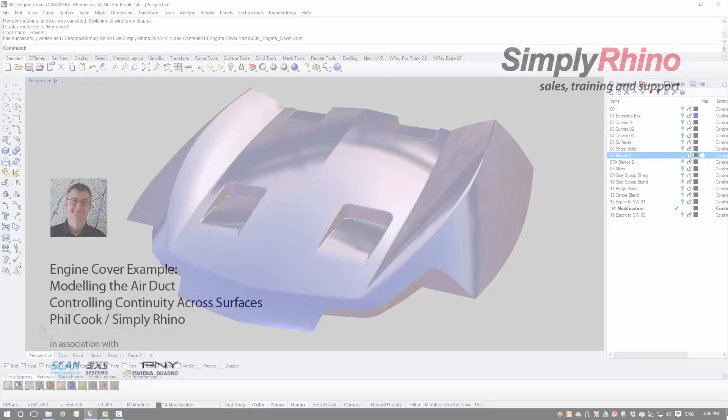First, I'm going to take a look at creating this scoop on the main engine surface. There are two main considerations here. First, we need to maintain a seamless continuity between the main surface and the lead-in to the duct. Second, we need to control these edge blends so that they transition from a relatively straightforward edge blend condition and then run into the main engine cover surface. These are both fairly common problems in 3D modeling, even though the specific context might be different.

Once we have the scoop completed, we'll then take a look at mirroring the two halves of the engine cover and then creating the final center blend. Finally, we'll make sure that everything is ready to export into SolidWorks.

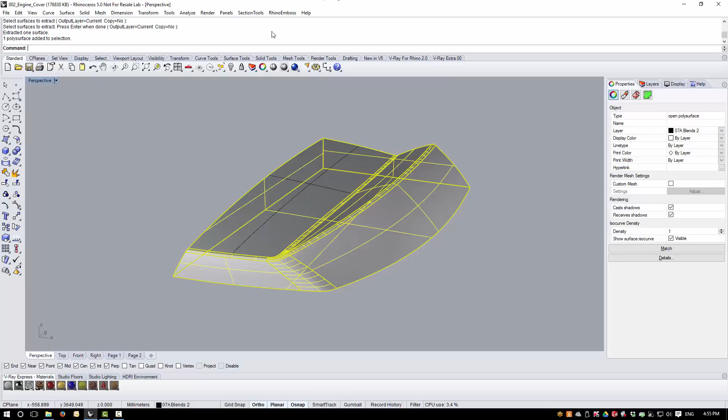This is the result we obtained from the modeling we covered in the last video exercise. Now, to start to add the duct detail into this top surface, first of all I'm going to extract the top surface, the main top surface here, and I'm going to hide the rest of the geometry.

I then need to add some curves to describe the sharp boundary of the duct area. These can be either curves that you draw and then project onto the surface, or in this case they're actually created from isocurves. The advantage of using isocurves to create the boundary shape of the duct is that the shape that's created will be very close to the overall shape of the surface.

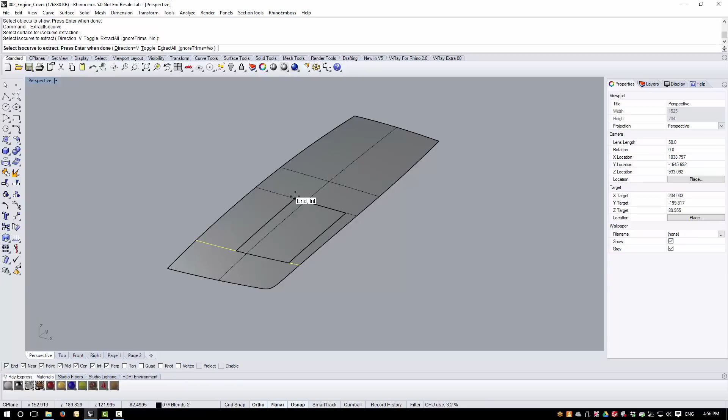So to create these curves, I went to Curve, Curve from Object, Extract Isocurve, and toggled to produce curves in the other direction.

And then once I have these curves, I can trim them up with each other and join them. We need to make sure, by just checking in object properties, that the curves, when they're joined, produce a closed curve. Once we know that's the case, we can then go ahead and split our main surface with this closed curve. And I'm just going to hide the curve now.

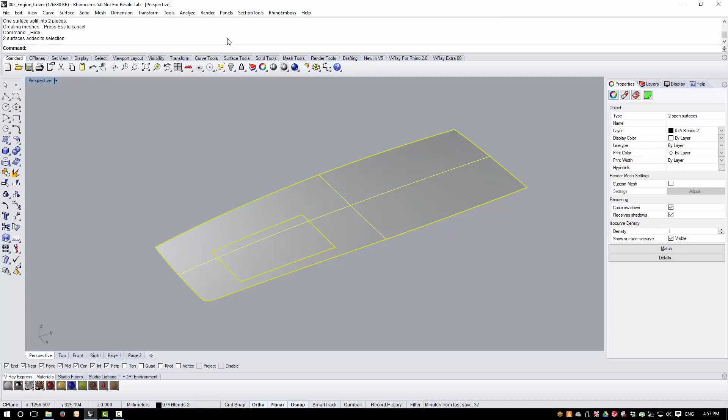Now, of course, because these two surfaces are essentially derived from the same parent surface, if we go to our Analyze, Surface, and Zebra tools, the area that we've trimmed out will be completely curvature continuous with the surrounding area.

The idea here is that we're going to leave the front edge of this surface as it is and adjust the rear edge of the surface to create the scoop. The fact that we don't change the front of the surface means, of course, that it's going to be curvature continuous with our existing surface.

Now, the first thing that we need to consider here is if we look at the control points for our small trimmed surface, they actually describe the overall larger surface, because when you trim a surface you don't actually change the control point structure.

What we can do to make our control points here more manageable and relate more closely to our trimmed surface is to select the surface and run a command from Surface Edit Tools called Shrink Trimmed Surface. What this command does is reapproximate a new surface that has the same shape in U and V, the same number of control points, and the same degree in U and V.

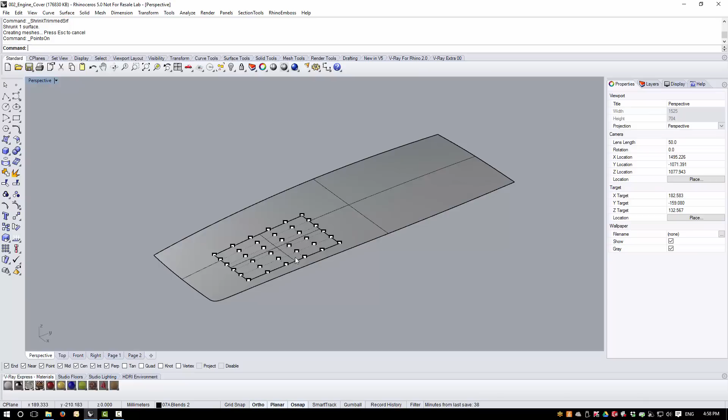The idea being that now our control points are relative to our smaller surface, but when we analyze the curvature of this with our Zebra tools, we'll see that our surface hasn't changed in terms of its shape, and so our two surfaces are still completely curvature continuous.

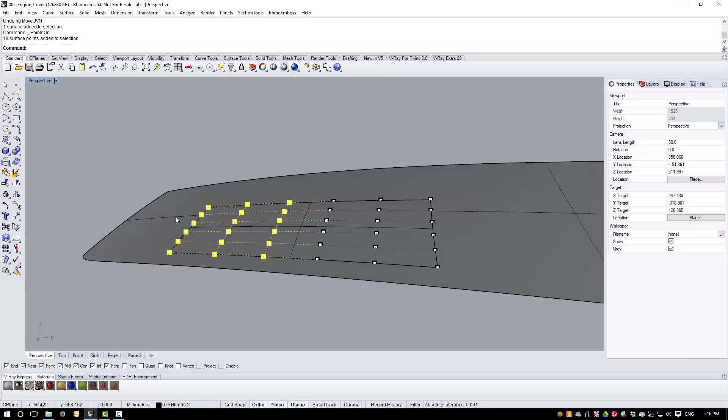If we take a look at the control points on our newly shrunk surface, what we know is that these first 3 rows of control points need to remain exactly where they are in order for us to maintain the continuity at the leading edge of the scoop or duct. So it's only these 3 rows of control points that we can move.

Now, before we go on to really look in more detail at the shape of the scoop, let's have a look at the principle behind this. So the principle is that we don't move the first 3 rows of points, we leave those exactly where they are, and the subsequent points we can move.

Now, a good way of moving these is to use the Move UVN tool, which is situated in the Transform menu. What the Move UVN tool does is move control points either in the U direction, the V direction, or the N direction, the normal direction, relative to a surface. Now, normal means locally perpendicular, so each one of these control points will move locally perpendicular to the surface. So this is an ideal tool for either adding a recess or a protrusion to an existing surface.

The value that we put into this box here, into the scale box, is a real world value, and if I move a slider from the midpoint to either end of the slider here, I'll move the control points by 12 millimeters in a normal direction to the surface. So if I grab these 3 rows of points here and move them, you can see that I can start to create a dip in the surface.

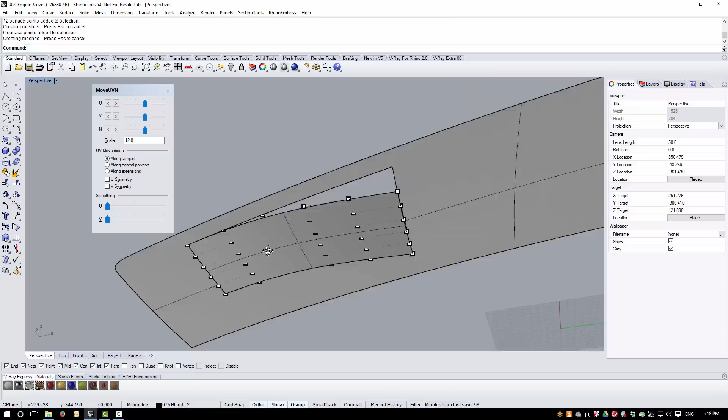And very quickly, just to show the principle, I'm going to now grab the last 2 rows of points and move those downwards, and then finally the last row of points and move those downwards again. So you can see now I've started to create a surface which of course now changes from our original surface and starts to create the scoop.

Now, because we haven't moved these front 3 rows of control points, when we look at this surface with zebras, you'll see that we have perfect curvature continuity between our existing surface and our new surface at this leading edge. And so the principle really is that we don't need to worry about matching this surface to our existing surface, because we know that our control points are already doing this for us.

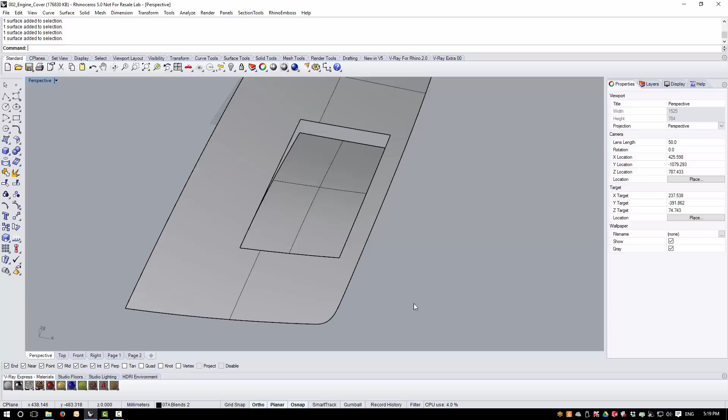Now, the one downside here of this method is that we don't have very many control points to play with here, and there's a large area of this surface that we can't move. So what we could really do with introducing here are more rows of control points, so that we can put a little more shape into our scoop, and that we can have the scoop starting to change direction a little closer to this leading edge.

So if I just undo my Move UVN operations and get back to where we were a few steps ago, I'm going to look now at introducing some control points into this surface. Now, the way that we do this is important. If we just add control points into the surface, we are going to change the shape of the surface, which of course is then going to lose our matching. Likewise, if we rebuild the surface.

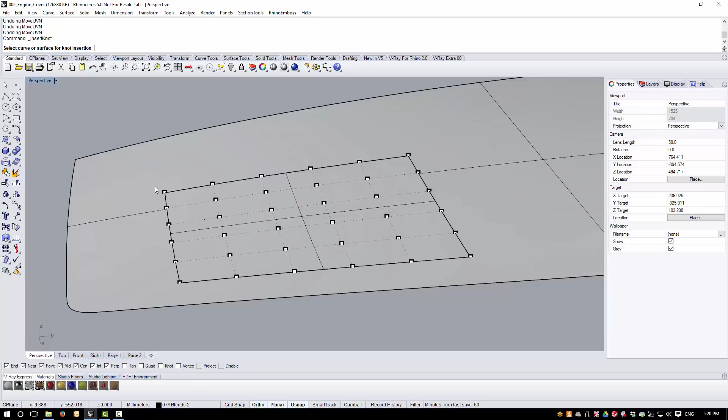So what we really need to do here is to insert knots into the surface, which will add control points by implication. So I'm going to go to my Edit Tools, Control Points, and Insert Knot. I'm going to pick this surface here, and I'm going to add a knot line that's just behind this first 3 rows of points. And then I'm going to add a knot line that's just behind what is now the 4th row of control points.

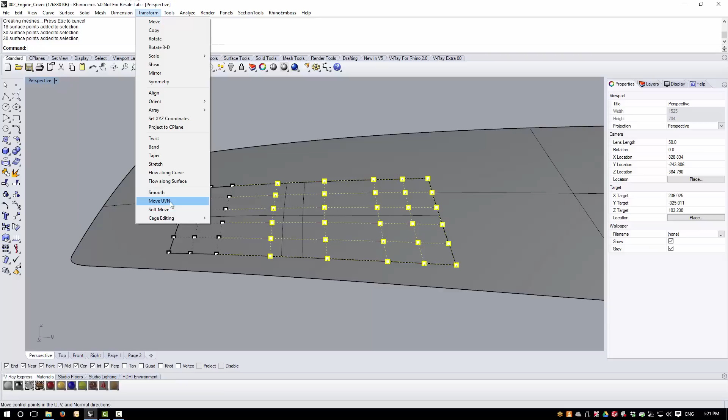And this is the result that I'll get now. My 3 control points, which are still controlling the matching, have now effectively moved much further forward. So now I can move all of these points and get more shape going on in the scoop. So again, I'm going to do something similar here. I'm going to go to Transform, Move UVN, maybe adjust this distance slightly, and I'm going to move all of these control points down.

The nice thing about this tool, being slider based, is that you know that you can push this back and get back to your original position, and I can then change the value here, and it's a nice tool to actually interact with. So gradually going to push this shape down.

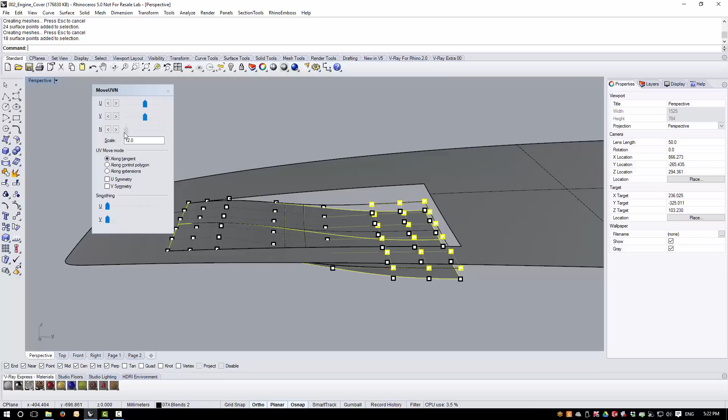Now what I've decided to do here is that I'm actually going to move these last 3 rows of control points together. So I introduce a kind of an S shape into my duct surface here. And the idea about using Move UVN here is that the surface that I've now created still has a lot in common with the top surface, so that this edge is going to be fairly common to this edge, and the fall off as it goes from left to right here is going to be fairly consistent with this surface.

So again, let's take a look at the continuity here. Okay, so that front edge looks okay. Let's also take a look at this with an environment map.

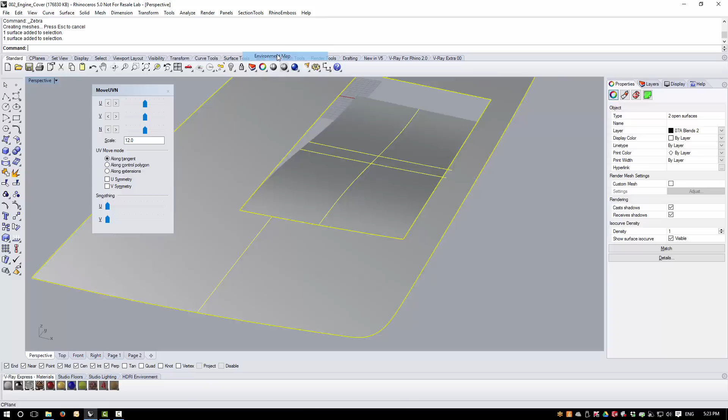Okay, and that looks quite nice. Okay, so you can see that we've got a seamless transition here between our 2 surfaces. So the zebra stripes that we use here really only give us an indication of whether we have curvature continuity

across our 2 surfaces. So to check with more accuracy, we can either go to Analyze, Curve, and turn on the curvature graph for both of these surfaces, or sometimes where we've got a simple proposition like it's just one single edge here, we can go to Curve and Curve from Objects, and we can extract an isocurve from both

surfaces and make sure these isocurves are coincident, and then we can go to Analyze and Curve and Geometric Continuity, and we can test the continuity across those 2 curve ends. Here we'll see that Rhino is reporting that these are G2, which is curvature continuous, and we could check this at a number of positions along this edge.

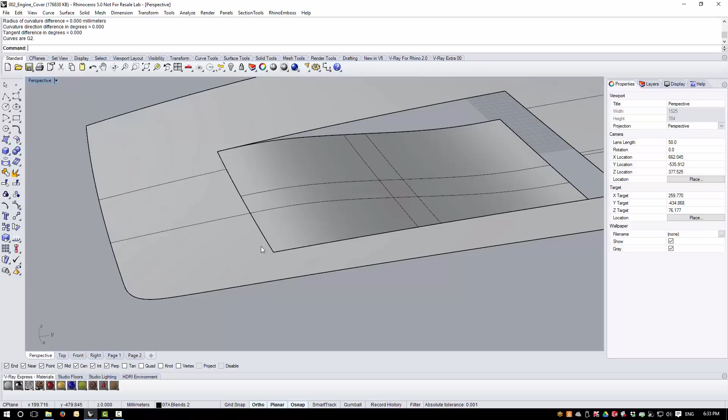So once again here, technically what's doing this for us is that these 5 control points here, the middle one of which is a coincident point, are required for a G2 curvature match. If we wanted to match beyond G2, then it's the next pair of points that would be required to be involved in the match for a G3 match. But in this sort of situation here, G2 curvature continuity is fine.

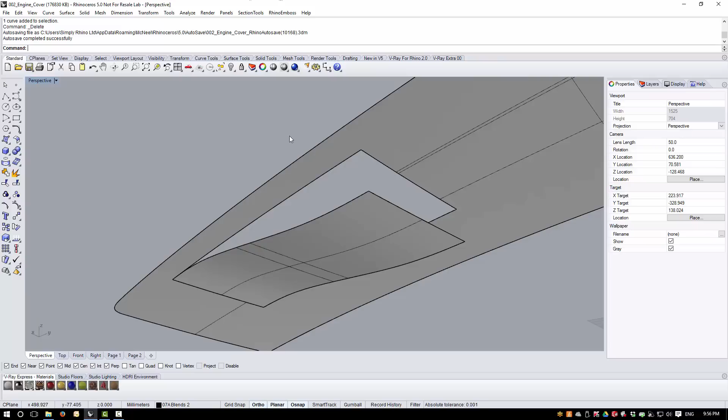Let's now take a look at making the side surfaces for the duct. First of all, I'm just going to check my distance between this point and this point, which is 36 millimeters, and I'm going to have some fairly simple linear sides to this duct, but I want to put a 10-degree taper on all 3 sides of the duct.

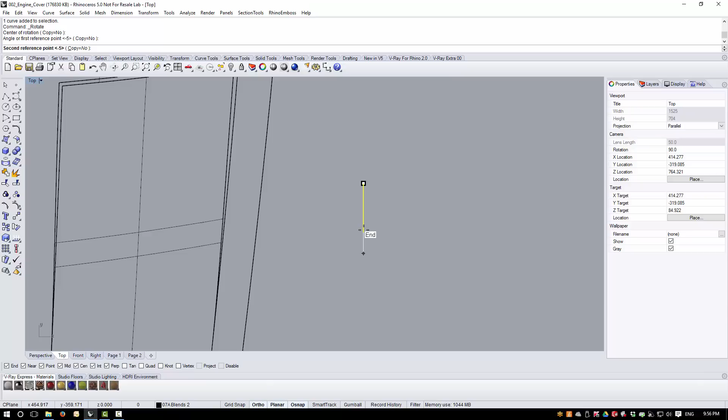So how I'm going to look at doing this is, first of all, to draw a line. This line I'm going to make slightly longer than my depth of the duct, so let's make this 50 millimeters long, and I'm going to put a point on the top of the line, and then I'm going to rotate this about the minus 10 degrees that we need here. Okay, and this is drawn in top view, and we're working in our world top C-plane, which is also shared here by our perspective view.

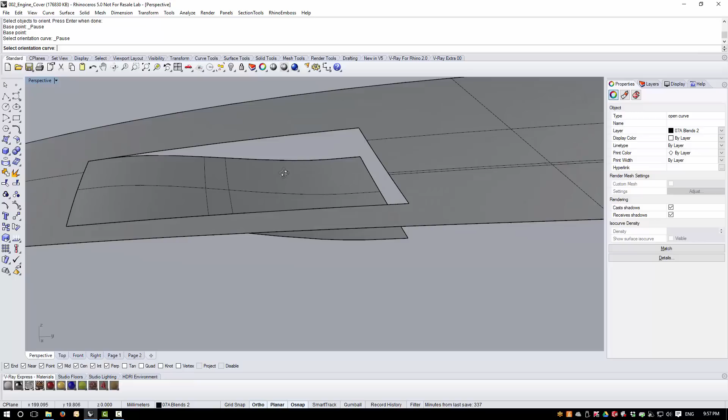The idea here is now I'm going to orient this curve onto these three edges, doing this in three separate operations, and to do this I'm going to use Transform, Orient, Perpendicular to Curve. So this is the object that I want to orient, and this is the base point, and let's start first of all with this rear edge, and you can see I can orient this onto this edge. I'll make sure the copy option in my command is turned on, and I'll snap this to one end of the rear edge. Okay, and then I'll repeat this process for the sides.

So Transform, Orient, Perpendicular to Curve, object to orient, base point, and edge. Helps if you can look down the curve when you use this command, just to make sure your 10-degree angle in using this example is facing the correct way. So once more, Transform, Orient, Perpendicular to Curve, object to orient, enter, base point, and then pick the orientation curve.

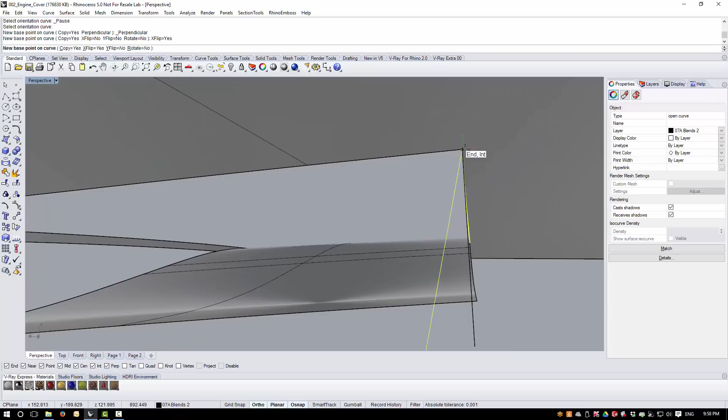Okay, here I need to flip the curve, flip the orientation in X to make this taper inwards and then snap to the end of the edge. Okay, once we've achieved the orientation, we can then use a one rail sweep to create the various surfaces. So Surface, Sweep One Rail, do the sides first. This is the rail, and this is the cross-section curve.

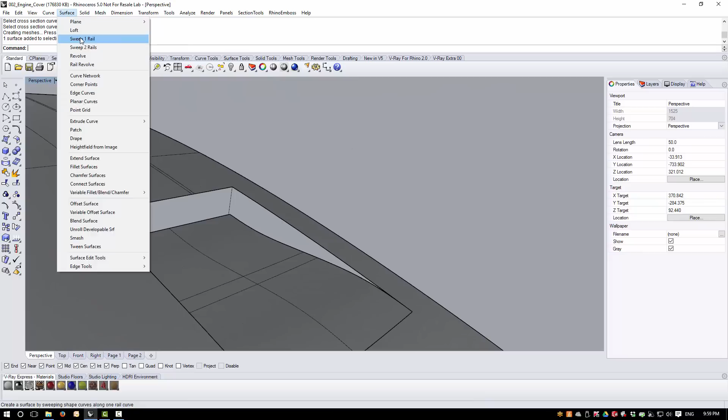When I use this command, I can use the simple sweep option here to give me some simplified geometry and a cleaner result. Repeat the process over here. Rail, cross-section, simple sweep, and then do this for the rear.

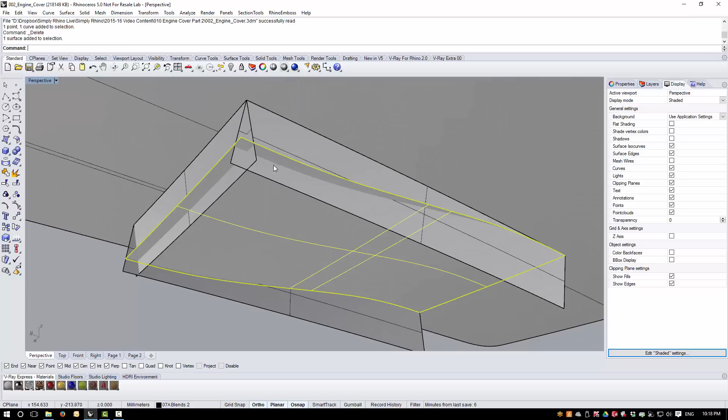So next we need to trim these surfaces with each other. So I'll just remove these curves, and to trim these surfaces I'm going to generate an intersection curve between the surfaces in question to start off with. You'll see that the surface edges don't actually run into each other exactly here. So the process that I'm going to use here is something like this.

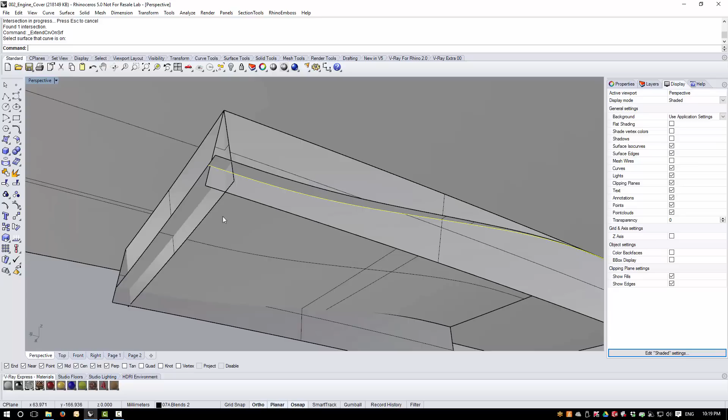I'm going to go to Curve, Curve from Objects, and Intersection, generate an intersection between this side and our scoop surface. That gives me a nice intersection curve, and then just to check that this curve is running all the way along both surfaces, I'm going to go to Curve and Extend Curve, Curve on Surface. Okay, and then I can trim these portions here. Can do the same on the other side.

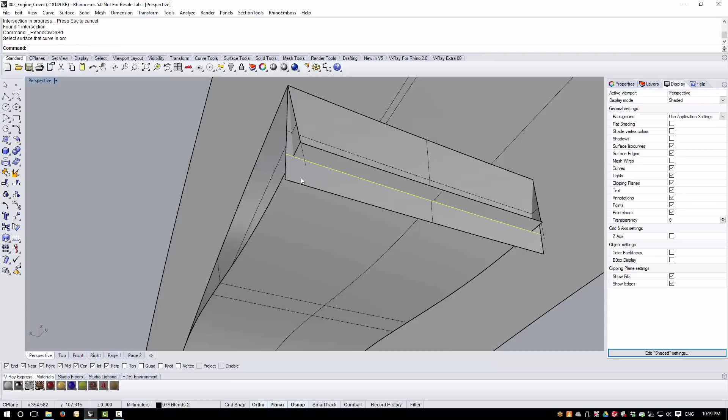So curve, curve from object, intersection, and then curve, extend curve, curve on surface, and then I can trim, and then finally this one here as well. Okay, and then we should be able to trim these surfaces now with each other.

Okay, so I can select my curves, delete the curves, select everything and join everything together, and then I want to check to see if all these edges are closed. So select the poly surface, go to my analysis tools, run show edges, make sure that only naked edges are selected in here, use a nice bright color, and you can see that all of this is closed up nicely in here.

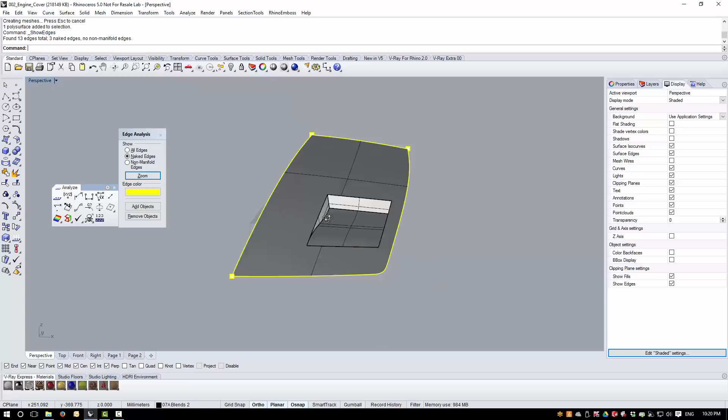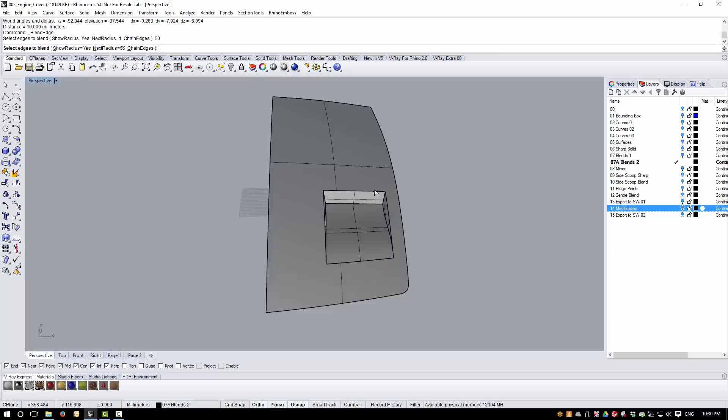So we've now got our kind of sharp version of our scoop or duct. So now I can start to add in the blends. So first of all, I'm going to put in the two larger corner blends. So I'm going to go to Solid, Fillet Edge and Blend Edge. I'm going to use a radius here of 50 millimeters, and I'm going to pick this edge and then enter to get into the preview.

And the rail type that I'm going to use here is distance between rails. So this takes a perpendicular measurement across these two edges here. Okay, and then I'm going to enter and let that build. Again, you can check this at each stage with the environment map just to make sure everything looks okay.

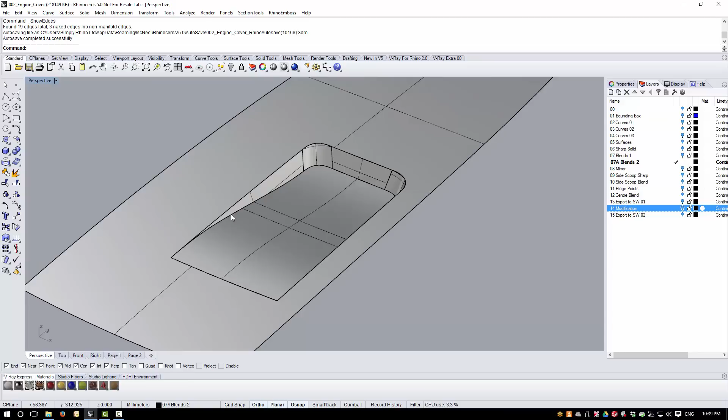And then now for the more difficult part. So as previous, I'm going to use the Solid Blend Edge tool for this top rail and this lower rail here. And as in the previous video, the blend will build correctly up until the point at which the edges of the blend run into each other, and then they will cross over each other. That's fine because it means that the rear part of this blend will build correctly, and the difficult part we have full manual control over.

So let's build our starting blends. So Solid, Fillet Edge, Blend Edge. I'm going to choose a radius of 10 millimeters here, and I'm going to pick the entire top edge and then the entire lower edge. Enter and look at the preview that we get here.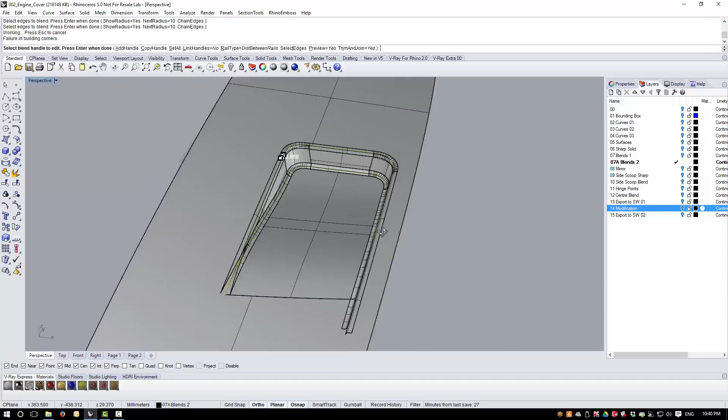You can see that the outer edges of these rails possibly are not too wrong here, but Rhino isn't really able to trim up the interim part here. And this edge over on this side, again, the outer edges are almost probably where they need to be, but again, nothing is built in the middle here. But this is a fairly easy solution now for us to remedy manually.

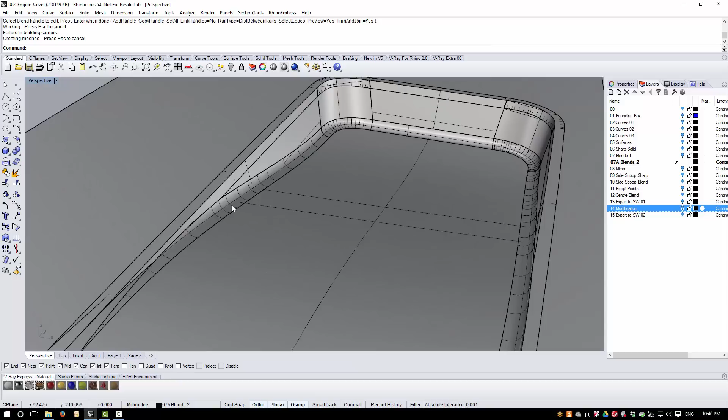So I'll enter to build the blend, and what we have here is a series of surfaces that have not trimmed my sharp-sided poly surface at all. And what I need to do first of all is to split these surfaces about the point at which they intersect each other.

So I'm going to go to Surface, Surface Edit Tools, and Split at IsoCurve, and I'm going to just make sure I find the correct point here, turn Shrink on here, and split this piece of the blend, and then split the upper part of the blend, again with Shrink on, at the coincident position. Now, I'm not going to throw away the front of the blend because I may need those later on, so I'll just hide these.

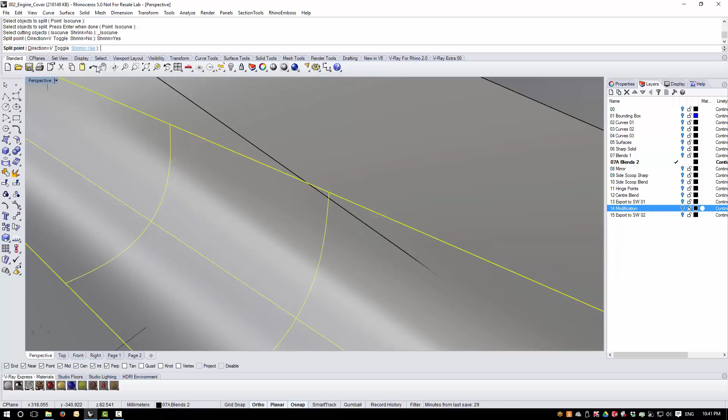And I'm going to do the similar sort of thing over the other side here. So Surface, Surface Edit Tools, Split at IsoCurve. Just zoom in, make sure we drop right on that intersection. Make sure we enable the Shrink option and split, and then same with this surface, and then hide these front parts.

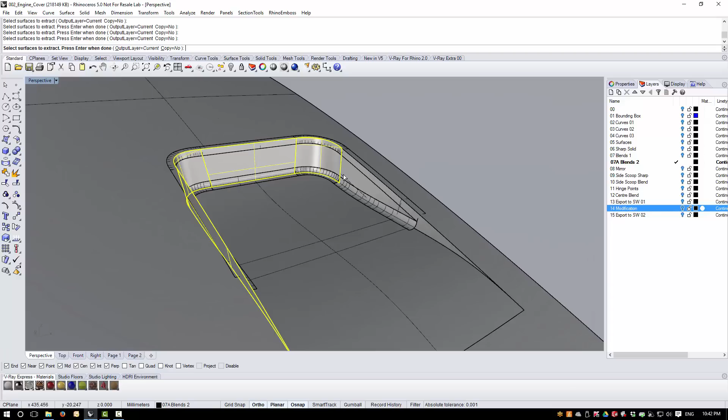Okay, so if I just extract these portions for a moment, we can then hide this part, and let's just trim away the side surfaces now with these blend parts.

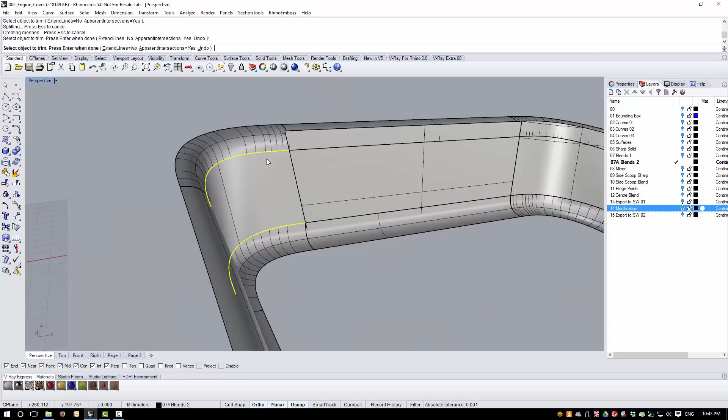So I'll run trim, I'll type in CRV so I can only pick edges, and I'll start to trim away these sides. Okay, so each time I'm picking the curve option here and just carefully trimming away these surfaces.

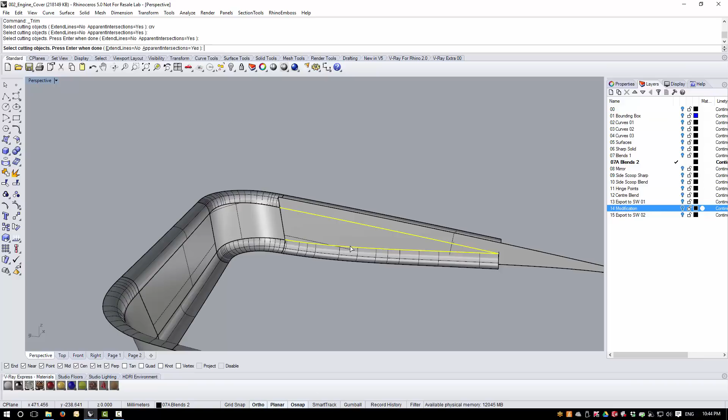And then now the final piece here. Okay, and then we can join these together. And we can check that these parts have joined together correctly here. That looks good. And then just take a quick look at these surfaces, make sure everything looks all right there. That looks fine.

Okay, so now let's show back in the rest of the poly surface that we need here, and let's look at what we can do with this front. What we need to avoid with these fillets as they come towards this front edge is running them to a point. It's perfectly valid to have a fillet condition here where you run into a point, but in this case the geometry is not going to look quite right for us.

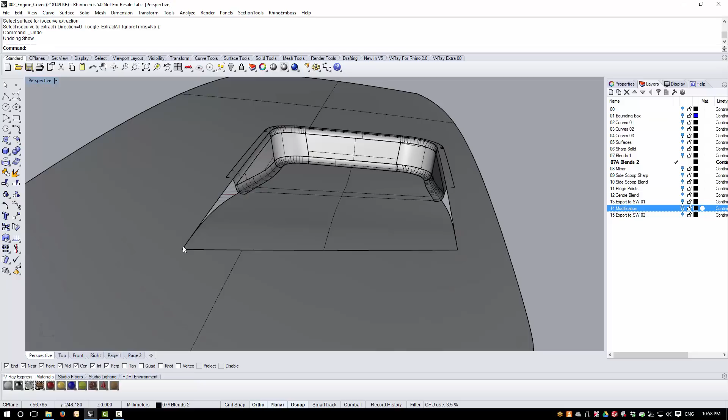But more important than that, because we have essentially one or two three-sided surfaces that are going to converge to a point, that's going to give us a big problem when we offset to give us our B surface. When we shell this out, it's going to give us a condition that will fail. So we want to create here a condition that not only looks good, but is also going to have enough integrity to be able to shell later on.

Now, if we look at, for example, the one side here of what Rhino actually built for us, you'll see there's a fair amount of consistency about these rails here. And if we continued this edge, the front edge of the scoop here, along here, you can see that we can get two four-sided surfaces here that start with the two blend shapes and then will run off to blend into the main engine cover surface at the front. So we can actually use most of these edges that Rhino has built for us here.

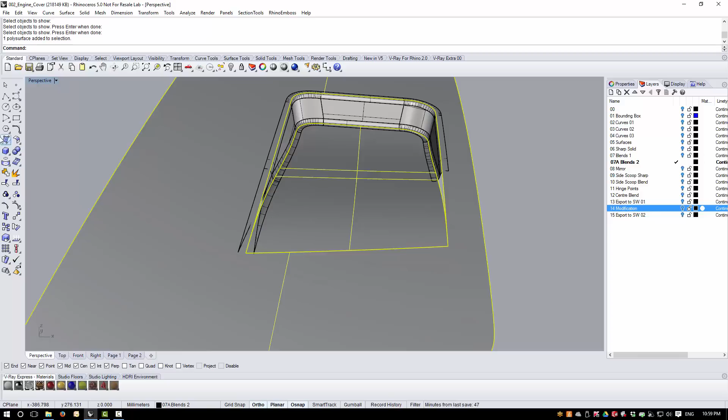So let's just look at this side first of all. I'm going to just explode this surface so this part and this part are separate, and I'm going to extract an isocurve here from this main surface and snap that to this leading edge. Remember, we created this leading edge with an isocurve, so this is helpful to us now.

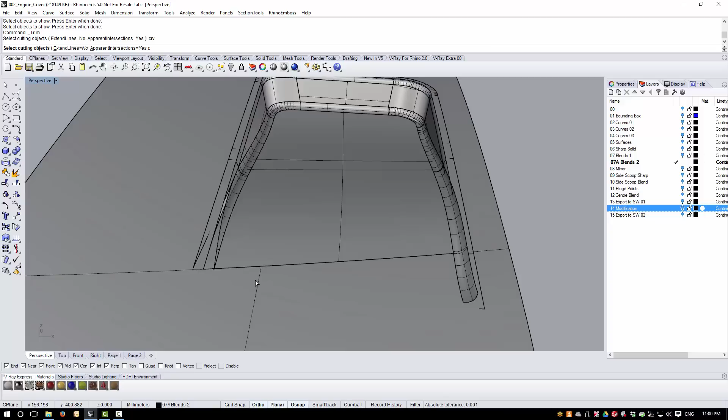Now let's bring in the other surfaces here as well, and you'll see we have a similar sort of situation here where the consistency of these outer edges of these fillets is actually quite good. So I should now be able to run trim and again type in the curve filter so I can only select curves and edges, and I'm going to trim the scoop surface with those edge curves.

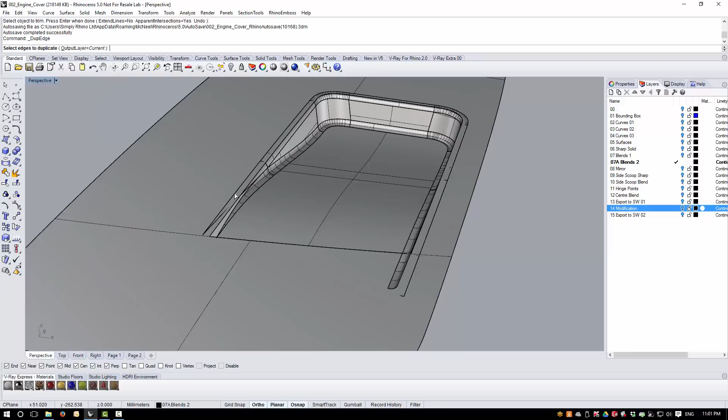And then I'm going to duplicate these two edge curves. Curve from objects, duplicate edge. There. Okay. And now I'm going to hide these surface parts here. I won't delete them just yet in case I need to backtrack at any stage.

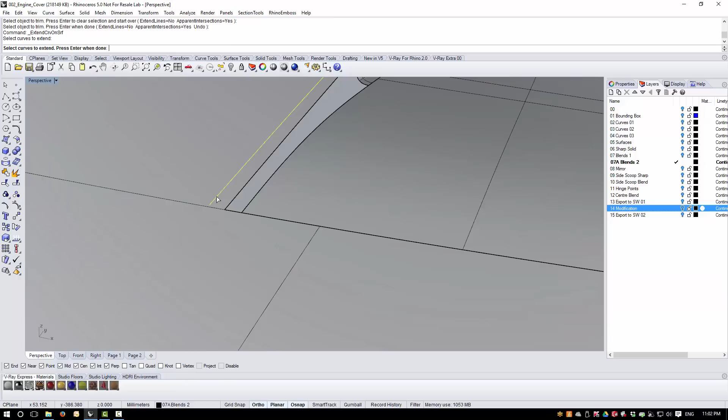This here can be trimmed up like so, and here this edge is a little short, so I'll extend curve on surface here, and then I can trim these parts up with each other like that. And now I should be able to trim this outer blend edge from my main surface. So this is a combination of curves and surface edges here.

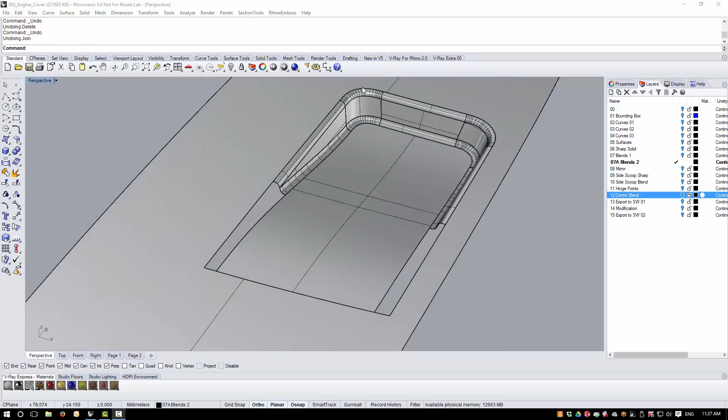So I'm going to run trim, use the curve filter, and then pick these edges and these front curves. Okay, and trim this out. Having trimmed our top surface with the outer boundary curves, we can now join everything together and then select any remaining curves and delete those, and check using our edge analysis that all our edges around here are joined up correctly.

And also, as we go along, it's worth checking with an environment map and also zebras as we go to make sure that we're not storing up any problems. So just want to look at the continuity here. Need to zoom into these areas to see zebras, and we may need to adjust meshes as well.

When we created the corner of the main surface in the previous video, we introduced a blend curve from this point here to a midway point on this edge, and we created two four-sided surfaces and then matched them to each other. We can do something similar here, and before I do that I need to make sure that this short edge here and this short edge here is split about its midpoint.

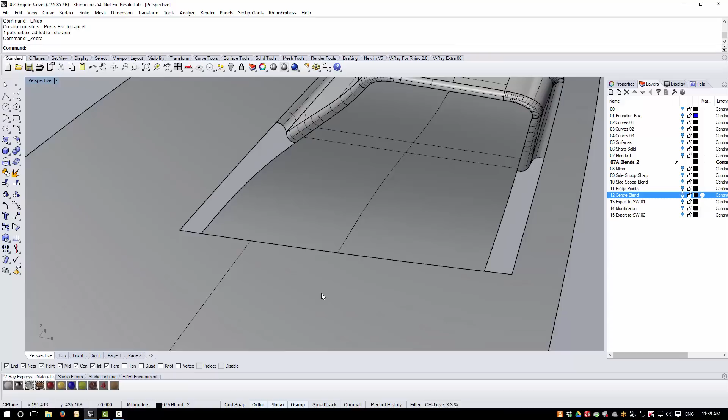This should have been the case from when we trimmed, but just to make sure that is indeed the case, we can go to Surface and Edge Tools and Split Edge. We can pick this edge here and split it about the midpoint, rerun the tool, and do the same over here.

Okay, now if we were to use the adjustable blend curve, we can either blend curves or edges, but we can't blend one of each. So because it would make more sense to use a curve for this position, what I'm actually going to do is to generate an ISO curve here and here that snap to the split edge. So I'm going to go to curve from objects, extract ISO curve, and snap to the end here and the end there. So now we can look at creating the adjustable curve blend.

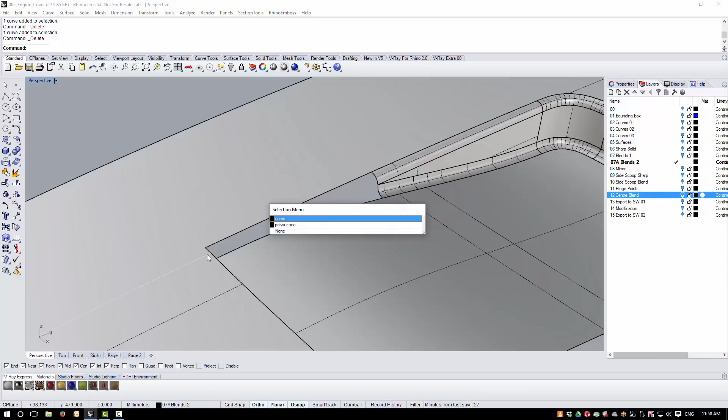So let's go first of all from this curve here to the lower edge of this top rail here. So let's go to my adjustable curve blend tool, pick this curve and then this edge, and we'll blend between there. Now because of the way that the geometry is working here, we're going to see a big difference in this curve between blending from this edge and this edge.

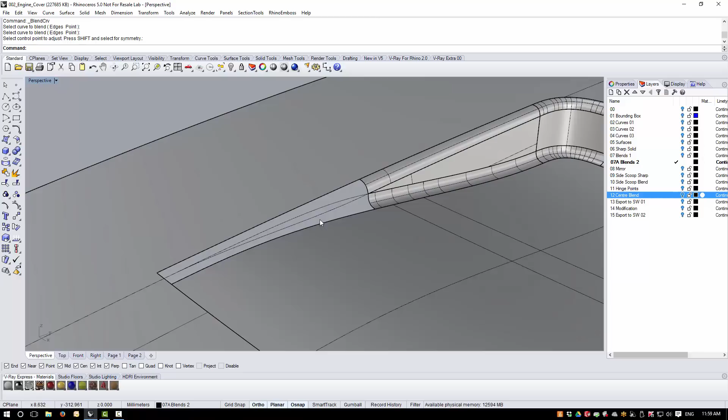So let's repeat the adjustable curve blend and blend this front curve to this edge. And here we'll see that we generate two quite different looking curves, and probably what we want is somewhere that's between these two curves. And there is a method here that we can use that will give us that result. So I'm going to delete these two curves, and I'm going to create a curve that's an average of this edge here and this edge here.

So to do that, I'm going to go to Curve and Tween Curves, and I'm going to pick this edge and this edge, move my cursor to the left edge and click, and you'll see that I can generate a curve now which is an average of those two edges. And if I go back to my adjustable curve blend here, we might see that this gives us a slightly better looking result.

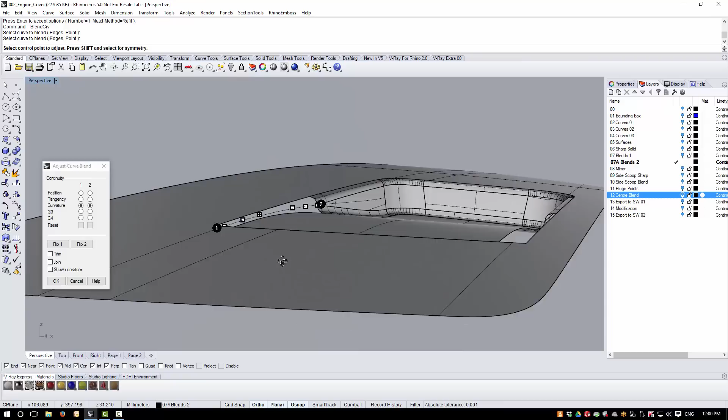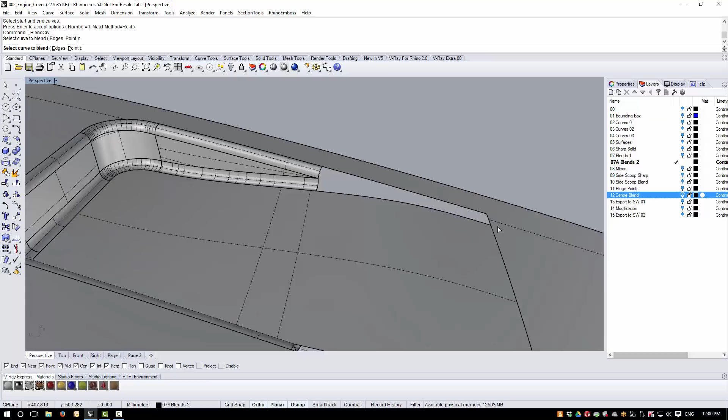Now we need to look at this curve carefully and make sure, for example, that this curve isn't dipping below this scoop surface here. So let's just take a look in right view here and confirm that, and that looks okay for the moment. Now with this process there may be an element of iteration, so we may need to redo this process a few times. But for now I'll use the similar process on the second side. So tween curves and then adjustable curve blend. And take a look at this curve as well, and we'll accept that.

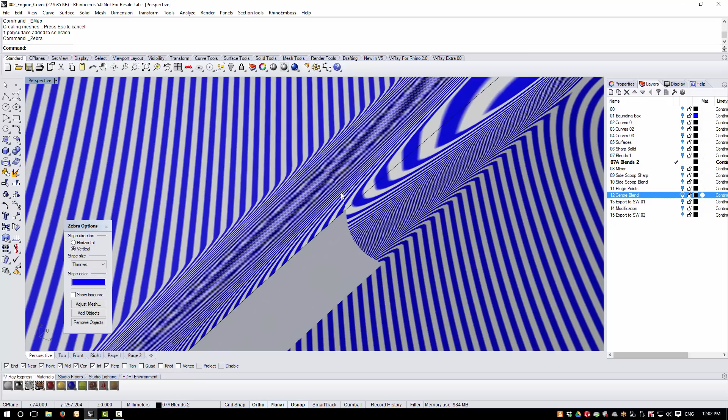What we can see if we go in close to this front edge here is that we're slightly out of continuity there. And let's have a look at this point here, and again just slightly out here. So before we start to get too worried about that little lack of continuity, one thing that will help the zebras is actually joining these two surfaces together. So let's do that and see what this front edge looks like now, and you'll see that looks a lot better. So for the moment I'm going to leave the surfaces as they are. We should just actually check, I guess, that these are actually joined up properly. Okay, that's fine.

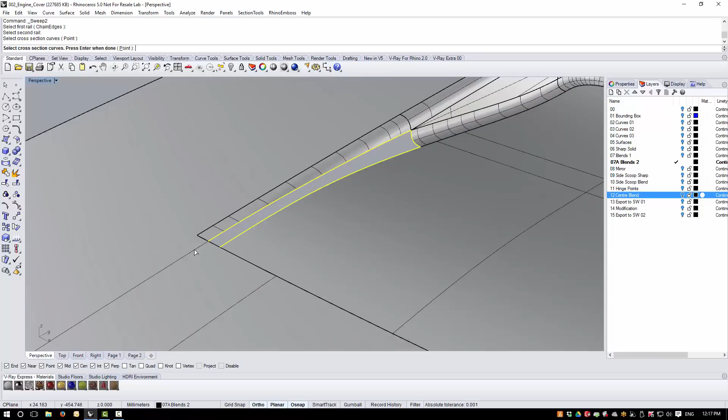And let's build in our other surface here, and let's again use a sweep 2 rails. So edge and edge as the two rails, and then these two edges as the two cross sections. Match curvature across both. Let's join them. Check first of all that they join up. That's okay. And now let's have a look at the analysis. Okay, so shape-wise that doesn't look too bad there. And let's take a look at the zebras. Just look right across that front edge. That looks okay.

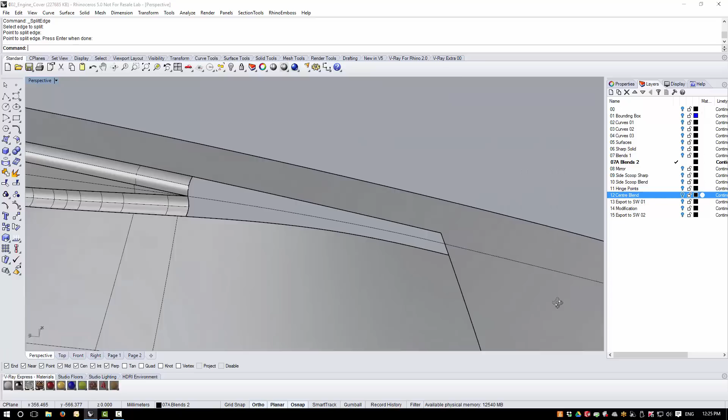So let's take a look at doing something similar on the other side. So surface, sweep 2 rails, first rail, second rail, cross section, and let's match for curvature on that top edge. Take a look at this shape that we get here.

Okay, that looks okay. Take a look at the front edge with the zebras. Just pull right into that edge. It's not too bad.

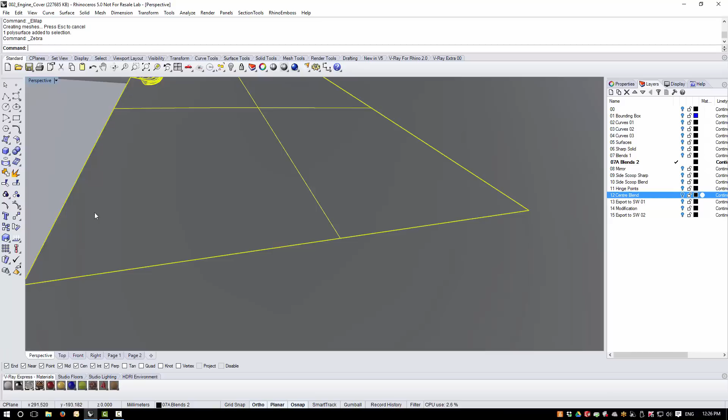Let's build another sweep in here. So I want the edge here, not the curve. Edge here, edge and edge. Match for curvature, crossing both of the rails.

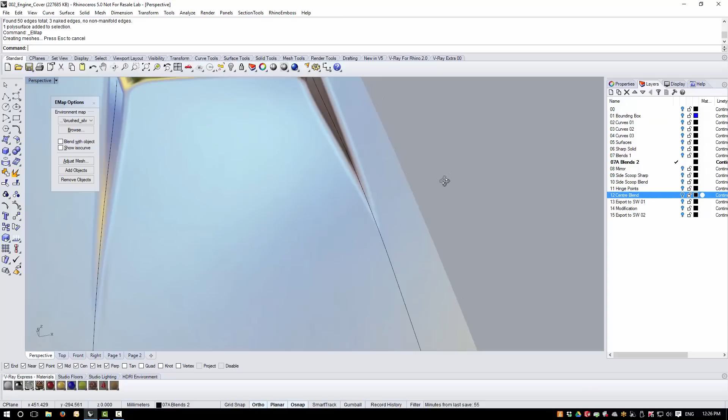Let's join. Check the join. And repeat the work with the environment map. Okay, so we should see that we get a pretty good result here.

Now, in some circumstances, you may find that as we get towards the front here, this edge becomes slightly problematic. So you might need to consider building a four-sided surface here, matching to three sides, splitting the edge of that surface, giving a little more room where this is one single surface. This might help the shape of the front of the blend in some instances.

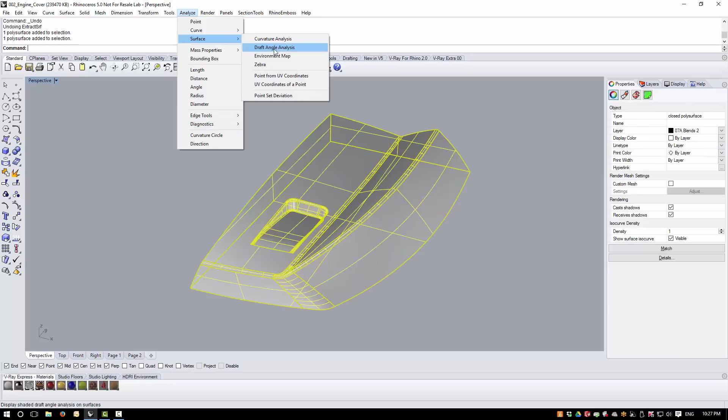So once we have achieved this, we can show the other parts of the geometry and join back together. Once we've joined the surfaces together, we just want to make sure that our result is a closed polysurface, and also we can run the environment map again to make sure we're happy with the various blends we've created.

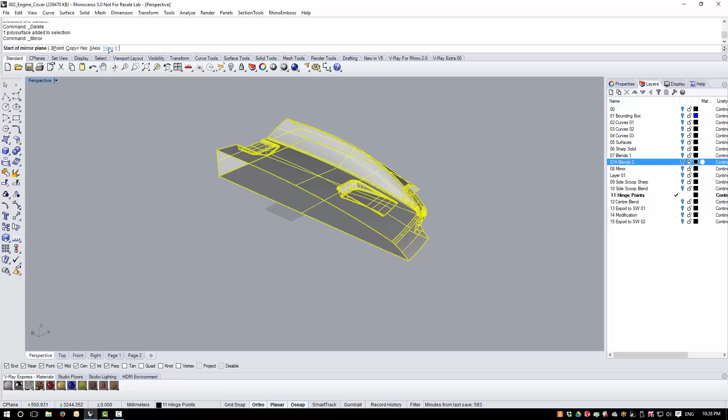Now it's time to look at adding any additional detail and then to mirror the other half of the engine cover. So I'm going to extract this center planar surface here and delete that, and then just run the mirror tool. The copy option is fairly obviously on, and I'm just going to hit the y-axis option here to mirror about a line of symmetry.

I can then join the two halves together and take a look at the result again with an environment map.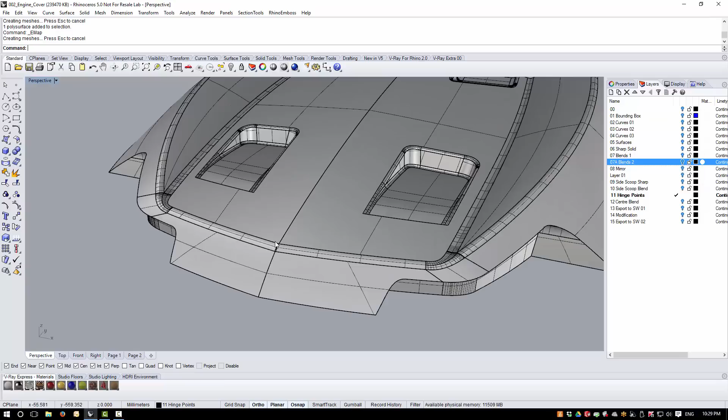Okay, so for this center blend here, I could use the solid blend edge tool, but there's possibly an easier way to do this.

I just want to check the distance across the perpendicular here - 19.999, so it looks as though I used a 20mm blend across this edge, and I'm going to go for something similar across the middle here. Actually, I'll probably use something slightly sharper across the middle.

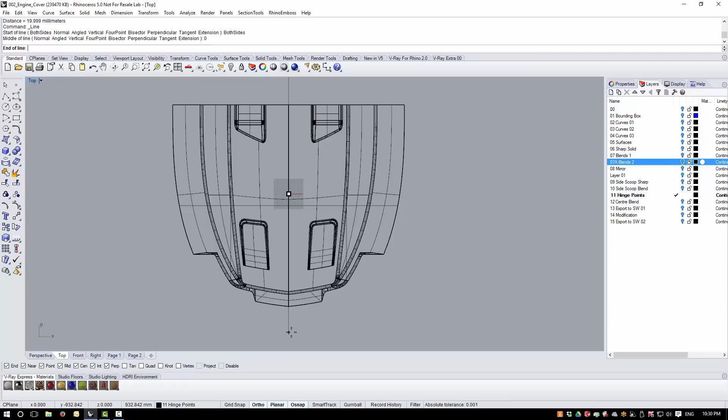Let's look at a pretty easy way that we can do this. I'm going to take a line here with the both sides option, start the line at 0 and pull the line along the center of our engine cover. And then I'm going to offset this curve with the both sides option on by a distance of 8mm, so I'll have a 16mm overall blend across the center.

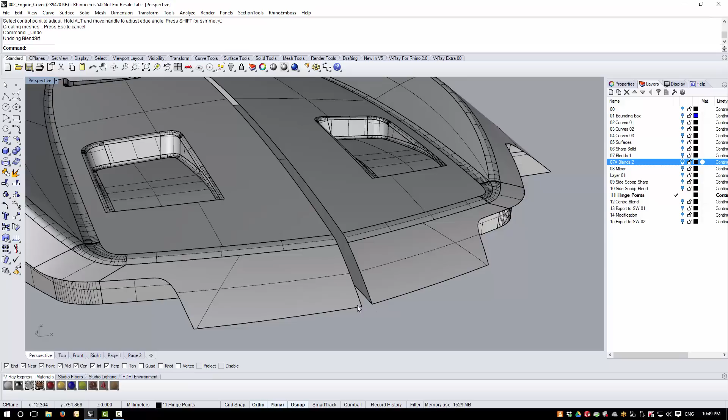And then I'm going to pick the two outside lines here and just trim away my engine cover. So we've now got a gap here between the two halves of our engine cover, and I'm going to use the blend surface tool to create a blend across these two front surfaces and across the two top surfaces. This area here I'm going to blend separately because I really need to control the shape of this blend correctly across here. Then for the underside and the back, these are just fairly simple planar surfaces.

Now I want to make sure that I've got enough shape to the blend here, so I don't want this blend to be too flat. So I'm going to run the blend surface tool here, first across this edge, and I'm going to lock the sliders, and just push up the blend a bit here, making a note of this blend factor that I'm using.

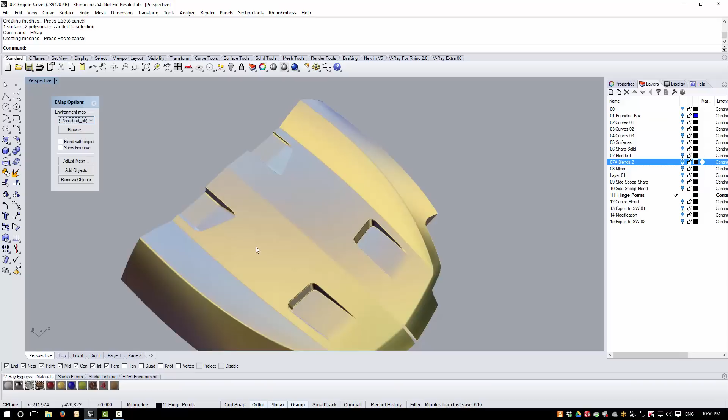Let's have a look at this with the environment map. I want to make sure that I can see a reasonably sharp blend across this center. Okay, that looks okay. And then I'm going to use a blend with the same factor on the front edge.

So once again, lock the sliders and use the same factor here. And then also take a look at this. Okay, that looks okay.

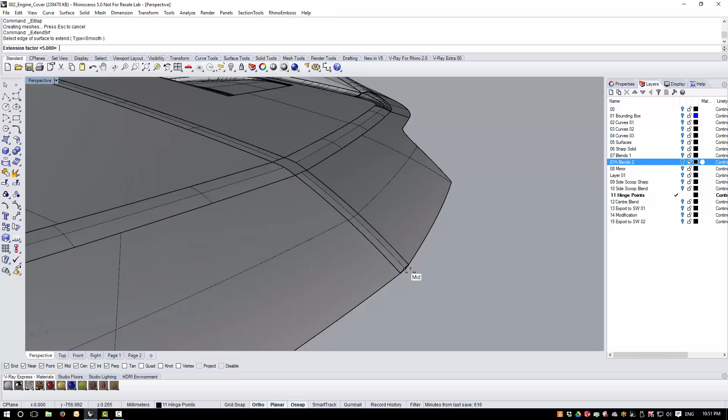Now you can see that this blend here is built slightly short, and as a result what I'm going to do is extend all of the edges of the blends just slightly here, and then I'm going to trim them off. So let's extend this by a couple of millimeters, and this one, and this back edge here.

First of all, let's do the easy parts here. Let's just trim with a line this piece of blend here, and do the same at the front.

Okay, to get the shape of this little nose piece right here, I'm going to use a technique that we've used before in this exercise. I'll use adjustable curve blend across here with a curvature continuous blend, and do the same here. Then I'm going to take this and pull it back onto the blend surface, trim away the blend with it, and likewise do the same here.

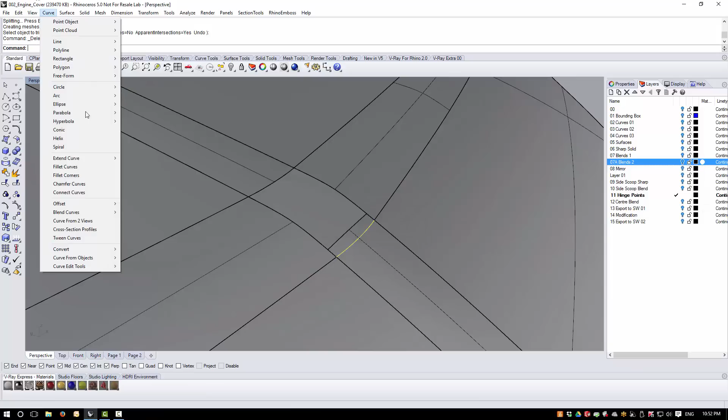If we blended this all in one go, blending this and this part here, then we wouldn't get this curved shape going across here. I think this is going to be important to explain the shape when we see the final result.

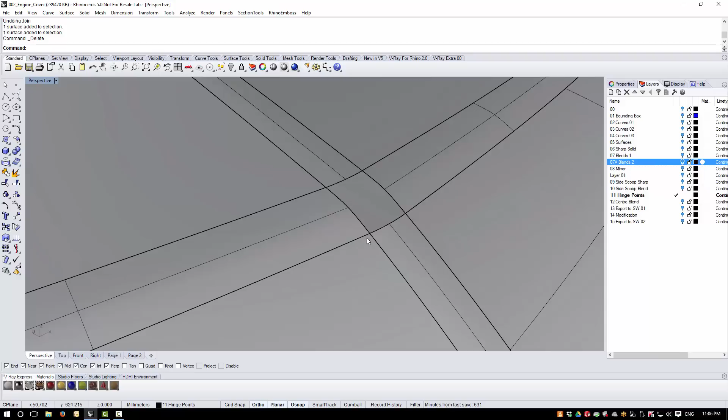So now we need to look at creating the surface that's going to fill in this little nose area. I could use a two-rail sweep here, but the issue will be in actually getting this edge and this edge, the cross-section edges, to join into a watertight condition. So I'm going to use a network surface here. The disadvantage is that it's going to be slightly complex, but because my geometry is reasonably good and my boundary shapes all have a lot of similarity to each other, I think the results should be okay.

So I'm going to use curve network, pick the four boundary curves or edges, match for curvature on each edge. The important issue here is to make sure this tolerance value is the same as your absolute modeling tolerance. Here we're using the default small objects millimeters tolerance of 0.001 of a millimeter, and that's the value I need to set. If I slacken this value off, my surface will be less complicated, but there's less chance my edges will actually join into a watertight condition.

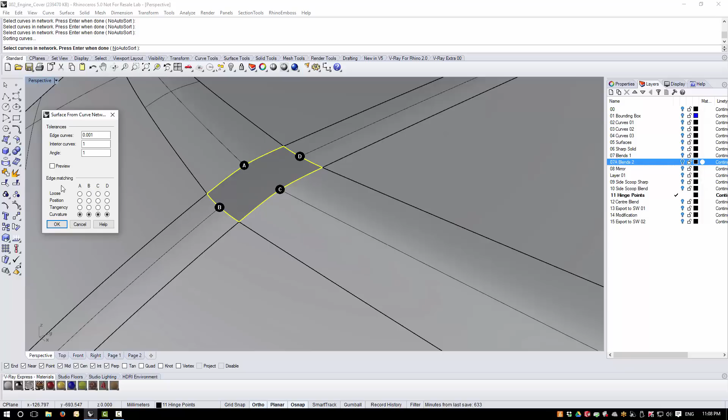So I'll preview that surface and OK this. I'll join this together, and now we can take a look at what this looks like. Okay, so that looks okay.

Let's take a look at this with the zebra stripes. First let's make sure this is joined up into a watertight condition. Yep, that's okay. Let's take a look at the zebras across the edges here. Okay, so that's pretty good. I can't see any disruption along these edges here.

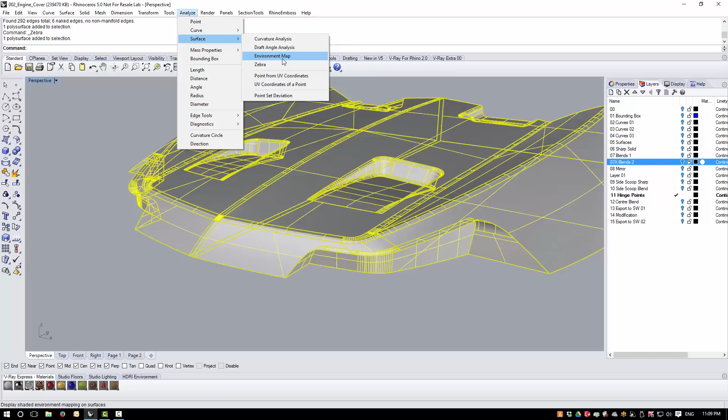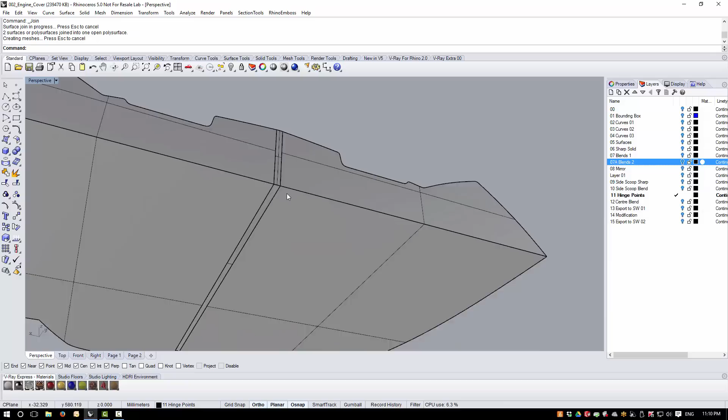So all we need to do now is create our planar surfaces to close off the volume. Just draw a little line across here and use surface from planar curves. Join this together, and I can just cap to finish off the lower part. Okay, so we've got a closed poly surface now.

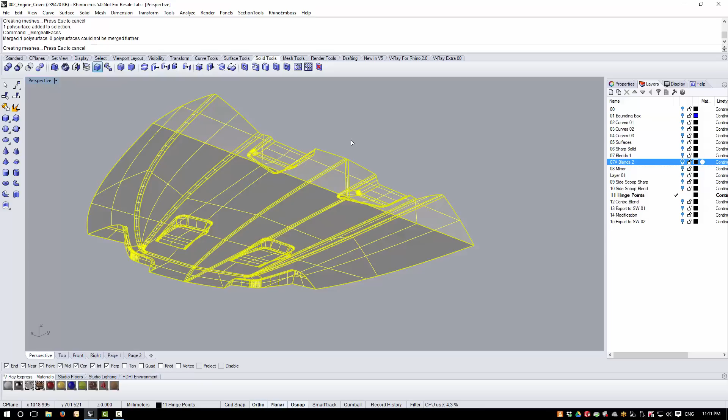So just a few things now that we need to do to get the geometry ready for SolidWorks. First, any coplanar surfaces like this are possible issues for SolidWorks, so we can clean these up very easily. Pick the geometry, go to our Solid tools, right click on this tool, and this is Merge All Coplanar Faces. Any coplanar faces here will be merged. Okay, you can see this face now is one face, as is this one here.

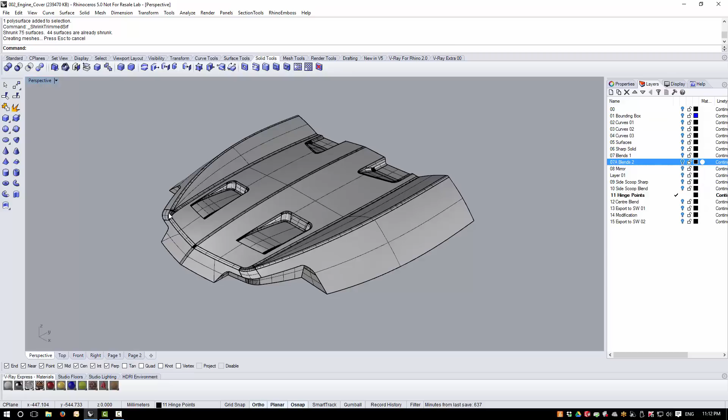The other tool I need to run here is Shrink Trimmed Surface. I can run this on a poly surface and it will shrink the individual surfaces. So Surface, Surface Edit Tools, Shrink Trimmed Surface. Here it's going to shrink 75 surfaces, and 44 are already shrunk. These solid modelers will work much better with trimmed surfaces. The disadvantage of shrinking is that if you need to untrim and rework any of the blends, you may have reduced the size of your base untrimmed surface by too much to do this. So you would generally do this on a copy of the geometry.

So one last thing we should do now is pick our geometry and run check, just to make sure our poly surface doesn't contain any bad surfaces, and that's all fine. So we're now pretty much ready to move downstream, in this case to SolidWorks. I hope you found this video useful, and thanks for watching.